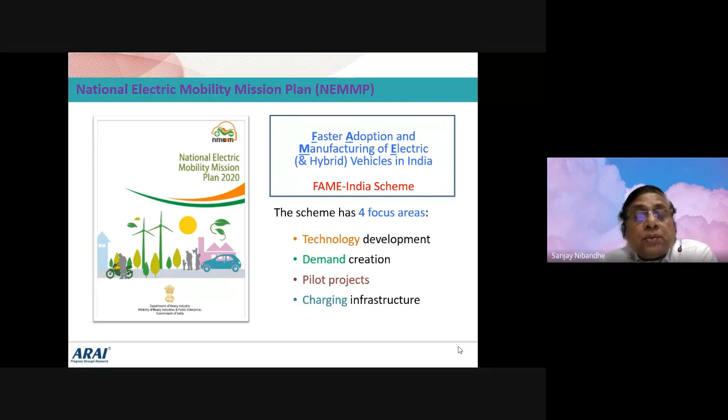So if you look at FAME, there were two policies: FAME 1 and FAME 2. In FAME 1, certain allowances were given to manufacturers so that charges of excise duty, or today's GST, were exempted in terms of tax reduction facility, which could be passed directly to the customer. So the customer also gets benefited, OEMs also get benefited, and promotional policy by the Maharashtra government or Indian government was taken up by various states as well, so that India, particularly the northern belt, picked up very fast and could progress well.

If you look at the number of vehicles being deployed, it's quite a large number. Niti Aayog's reports also say that mobility transformation requires a lot of focus on alternative fuels, alternative energy, or electric vehicles.

There is one concept of shared vehicles, a second concept of electrical vehicles, and a third concept of connected vehicles, which can see good market potential by 2030. That is how the entire policy was framed, so that growth can happen and the current level of manufacturing of gasoline or diesel vehicles can substantially come down.

Even today's budget has indicated that an old vehicles scrapping policy has been considered, after necessary approvals. Probably after 15 years, one can look forward to scrapping of those old vehicles.

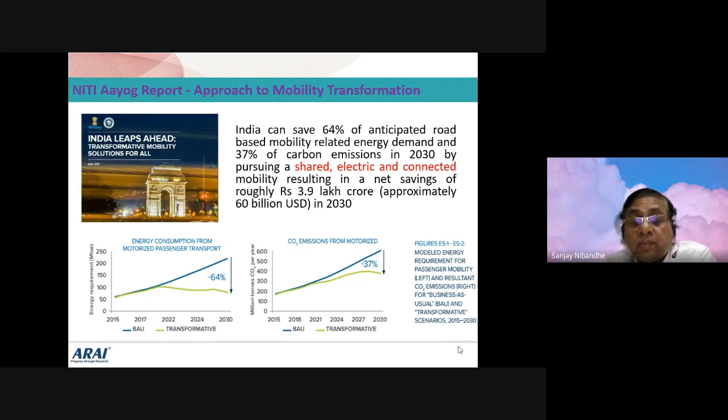There's also an indirect benefit of emission reduction, as these non-polluting vehicles come from electric mobility, or maybe hybrid vehicles, or hydrogen vehicles which may come up in future. Looking forward, there are certain global areas where European countries have taken up a stringent target.

By 2030 they want to achieve more than 50% EV vehicles in the market. They also look forward to eliminating complete usage of fossil fuel by 2040, focusing on electric transformation, with electric transportation primarily considered. So companies like Volvo, Daimler, Volkswagen, and Mercedes came into the picture and started producing those vehicles.

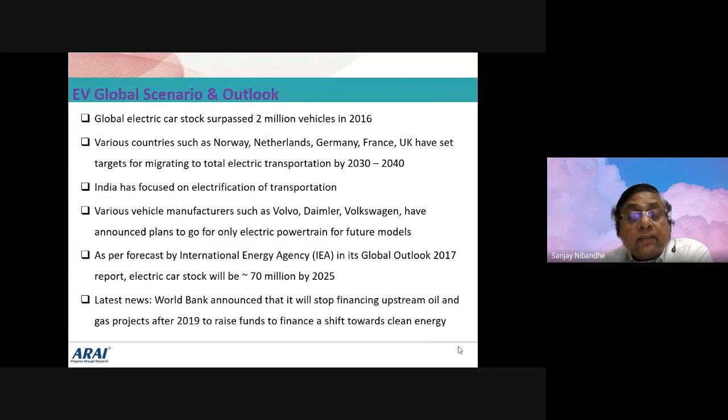The International Energy Agency's Global Outlook report says electric car stock will go to 70 million by 2025. That means a huge number of electric vehicles will be produced by all these OEMs, and people will certainly make use of them. If you look at the products, you have everything from small two-wheelers to huge trucks that can run on electric power. We are going to see all those examples as well.

That is how the World Bank is supporting policies across the world that are supportive of electric vehicle mobilization.

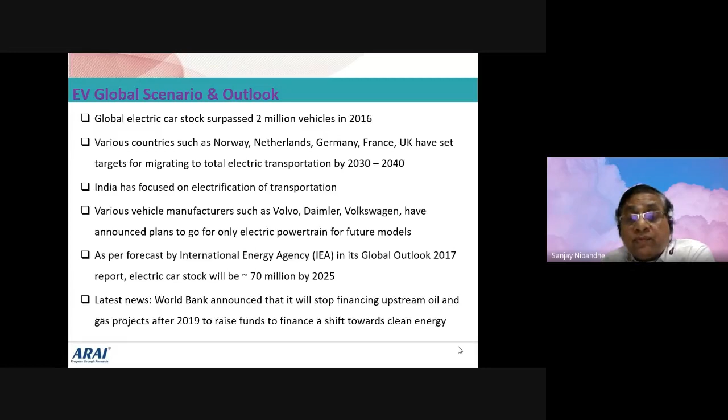Now the government in India is also keen to convert e-rickshaws, e-autos, taxis, and buses. For Mumbai, Pune, Nagpur, and major metro cities, they have already adopted policies for city transport buses to be converted to electric mobility. More than 500 buses have been ordered even in pandemic conditions and supplied to cities like Mumbai and Pune, which have started using those electric buses.

Of course, there will be some problems we can look into, but the major objectives are reduction in the fuel bill for fossil fuels like gasoline and diesel, and emission reduction, which need to be handled in a large way.

There is another area that talks about swappable batteries, and recently a regulation has come up which says the car manufacturer can sell their car without selling the battery.

So cost of the battery will be eliminated from the car prices. Similarly, when you go to the market, there are agencies which are available and which will help you to do the swappable batteries, like go to a service station, change your battery and go for the renting purpose as the normal charges for electrification are being charged.

They may charge you on a little higher side, but the basic investment of something like 1.5 lakhs to 2 lakhs will not be required in the initial stage, so that the cars will be cheaper and more promotion can happen from that perspective also. From private vehicles to the larger ecosystems, they are helping you, and that is how the entire scenario is positive on electric vehicle programs.

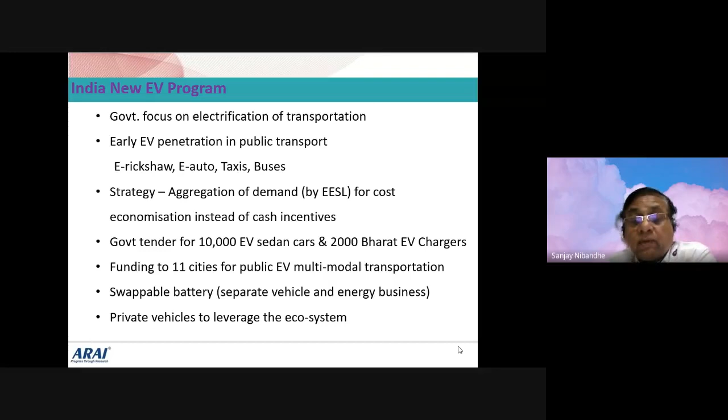So if you look at various parameters, the Paris climate change is one of the reasons, ambient air quality concerns, which we talked about, and we have seen in pandemic conditions there was clarity on the ambient clean air quality. People can have larger visibility. Also, from the northern belt they can see the Himalaya range, or also the birds and the animals which are coming on the road because of the silence, or even the pure air which was absorbed by everybody. So these kinds of benefits are very much found in the entire scenario.

Import bill of oil is another, which is a burden to India, and that's how people are more keen to reduce the import bill. Similarly, thrust on solar power generation and the storage of solar power is another area where the work is parallelly happening.

Sir, is it okay with the pace and the volume? Yes, sir. It's fine. Yes, yes, sir. Okay. Thank you, sir. Okay, okay. So we'll continue with this. I think that's a better thing to check in between.

So what are the drivers for electric and hybrid vehicles? The stringent emission norms, which we have already seen. Fuel economy we have already seen. Likewise, whenever the fuel prices go up, we always talk about, oh, this is the very low mileage which we are getting, and people always talk about the price of the fuel, which they are really concerned about. Then high specific power.

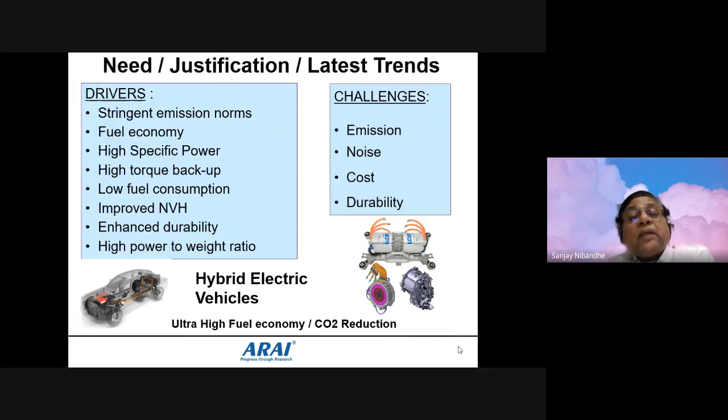In the electric vehicle scenario, I looked at it as one part. These are the standards which have been enforced as a part of the CMVR requirement, and any manufacturer in India has to follow certain requirements; these are the areas where they have to work. Like AIS 38 talks about the construction and functional part of it. AIS 39 talks about the measurement of electric energy consumption. Then AIS 40, the method of measuring the range. Range means per charge, how many kilometers it can clock.

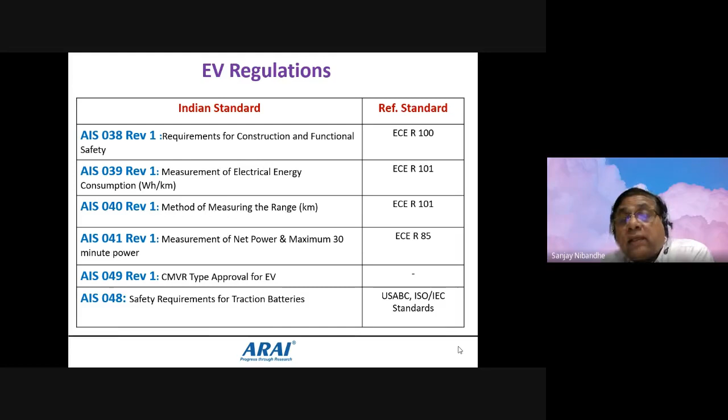Similarly, the 41 standard talks about the power from the motors or batteries. 49 talks about the CMVR approval for EV vehicles. That is a practice which has to be followed. And 48 talks about the batteries. These reference standards I have given for the purpose of reference; if you look at those European standards, they are comparable over here. And if vehicles are required to meet European requirements, or if you are trying to bring vehicles from Europe, you will see that these reference standards will be followed by those respective OEMs.

There are additional requirements like Indian standard AIS 102, that is for hybrid electric vehicles, and AIS 102 part 2 is also meant for hybrid electric vehicles. There are certain categories for better understanding. M and N categories have been classified as passenger and goods carrier vehicles, and less than 3.5 ton is the range for which part 1 is applicable, whereas for heavy vehicles above 3.5 ton, part 2 is applicable. These standards are always available on the ARAI website. If you want to know about the entire practices to be followed, you can download them from the ARAI website. It is free for all people to understand and transfer the knowledge to each other.

Then there is a specific requirement because of Indian business scenarios that is called retrofitment. You are well aware that in India, the typical mentality is that even after 15 years, nobody wants to scrap those vehicles. They want to reuse it. So there is an environmental tax which they have to pay to the RTO. Or you may like to convert your vehicle from gasoline to EV, and this type of EV conversion is also allowed, authenticated, and approved by sources like ARAI. So AIS 123 part 1 is applicable for M and N category less than 3.5 ton. 123 part 2 is for above 3.5 ton, and 123 part 3 is basically for the kit manufacturers so that you can supply the kits to the suppliers. So that way, the retrofitment kit which can be approved is also being considered.

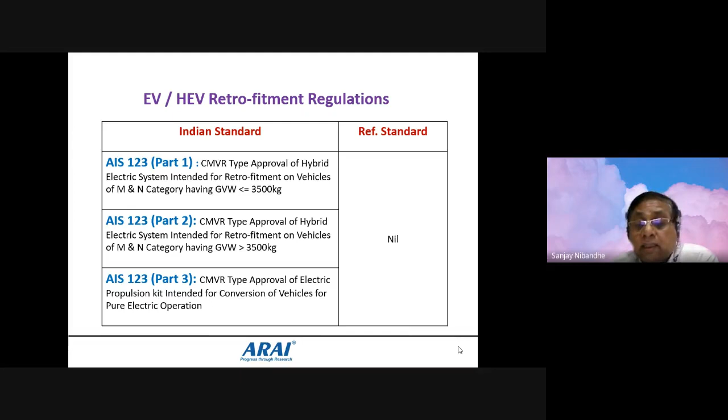So you may be a manufacturer or converter of the product, but you can get parts which have been approved by the respective supplier, buy those components, integrate them yourself and do the model approval so that you can be an authorized converter of vehicles or an authorized garage doing this type of conversion activity. And that's how this retrofitment business is also a huge business in India, which does not have a similar understanding in Europe or the USA. That's why there are no reference standards available for this. So we have made our own standards, and that is helping with the Indian requirements.

Now, when you see the electric vehicle, there is a combination of multiple things. When you say it is a purely electric vehicle, then there is no IC engine or SI engine. You have to take it out, and in place of that, you can put a motor, a battery charger, and the storage device for the electrical energy. That's how it is configured.

I'm not going to describe the figure. You can very well understand the figure, but battery, charger, fuel storage areas, you have to define, and you have to fix them in such a way that they are safe to operate and they are helping the entire purpose of the vehicle to drive as functional requirements.

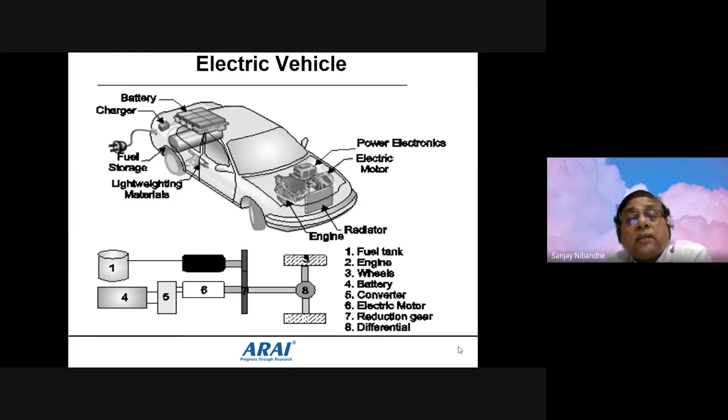Similarly, if it is a hybrid vehicle, both the combinations will be there, including the fuel tank, then powertrain in the front, and other areas like the transmission and the connections with the front wheel axle. So all those things will definitely be there in the case of hybrid vehicles. We will see the hybrid pictures as well. But if you look at this entire picture, you can come to know which are the parts involved in such type of activities.

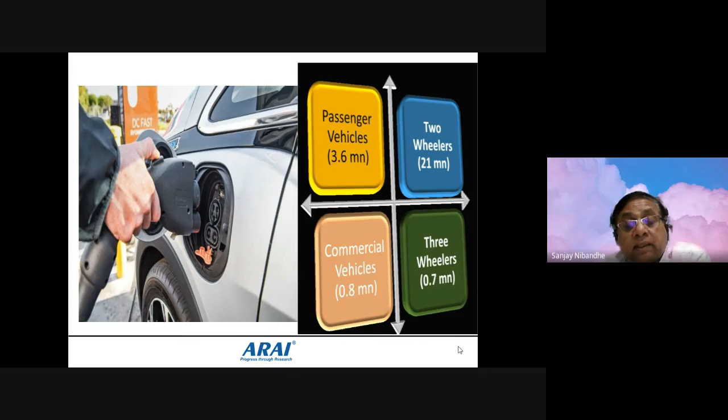In today's scenario, more than 3.6 million passenger vehicles are plying on the road. 21 million two-wheelers are plying on the road. Three-wheelers are more than 0.7, or close to 1 million vehicles. And commercial vehicles are at the 0.8 million level on the road. And there is a dire need of converting them to Indian requirements with the latest norms and trends being followed. So you can see the charger which is ready to connect with the electric vehicle, and the electric vehicle is properly configured here in the picture you are looking at.

And whenever there is no electricity grid available, or wherever they are not in the corridor areas, probably they can use their battery power which is available inside, which is fixed as per EV requirements. This type of trucking arrangement is likely to come up in India in the next 5 years. I would like to mention this only to see what is the potential business which we are looking at and which can be developed.

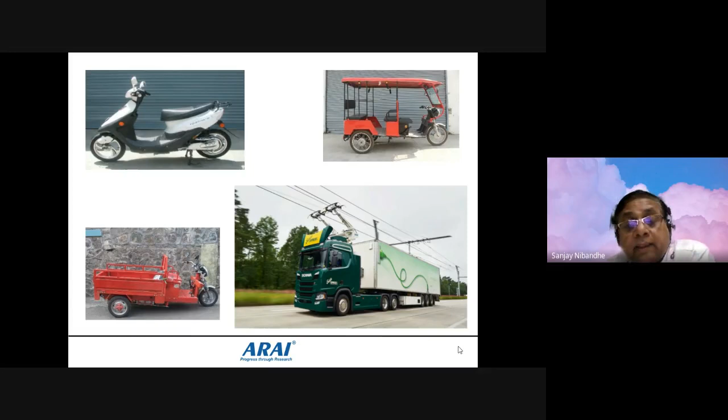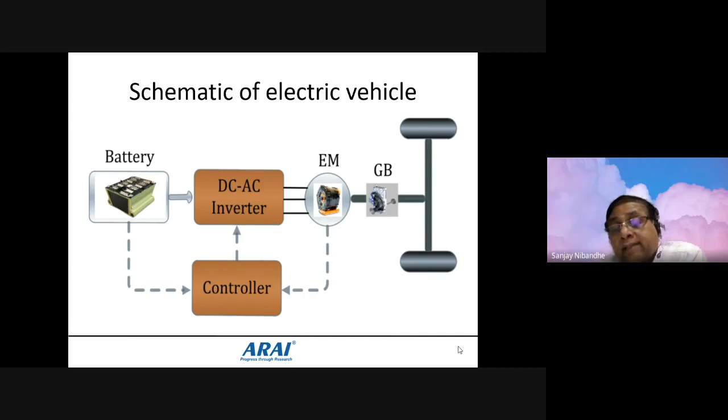This is the schematic diagram of electric vehicles. Battery is placed in between, inverter is there. Inverter is always controlled through the controller, which is giving you supply line from battery as well as to the electric motor. And the electric motor is coupled with the gearbox, coupled with the differential or axle level, and then that drives the vehicle in totality.

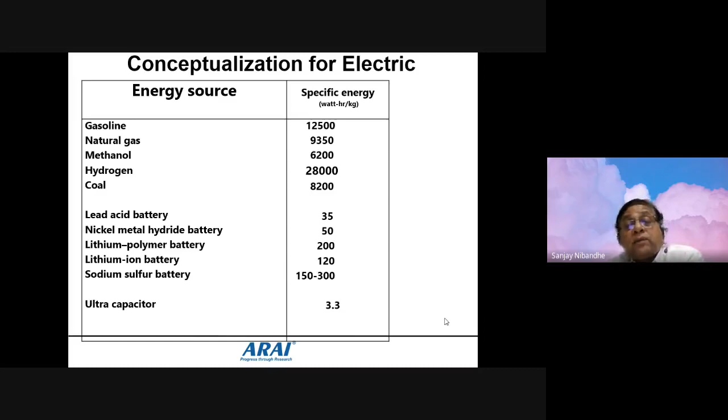Then lead acid batteries, if you compare, have a very low specific energy, nickel metal hydride batteries give something like 50 watt hour. Lithium ion batteries, which are more commonly used, lithium ion or lithium polymer batteries, are in the range of 120 to 200. And sodium sulfur is another type of battery which is likely to come up in the range of 150 to 300 watt hour per kg. Ultra capacitors are used mostly in the aerospace industries. Likewise, we have the devices for energy storage, and based on that, what is best suited for our application is required to be decided.

And generally in today's scenario, lithium ion batteries are well known, but lithium itself is not available in ample quantity in India. Recently, one lithium ore has been identified in Rajasthan, and Karnataka started producing lithium from one location, which is yet to reach a more commercial level. So in today's scenario, all lithium ion is mainly imported from China, and this China dependency is really a question mark for all of us.

So EVs are at stake, but we are lucky enough to say that at least 2 locations in India could really have something to deal with, and we can have lithium-ion batteries produced in India in future. As of date, most people are trying to get the cells from either Korea or China and assemble them here, which has a special demand on the technology part of it, because the entire battery itself is the volatile part which requires a lot of understanding about the battery requirements.

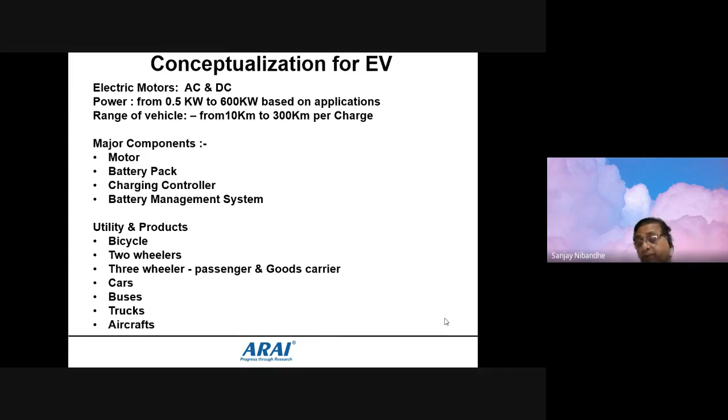So something like a bicycle, you can use it for 10 kilometers, and after that you may need charging, or cars going up to 300 kilometers, like the Tata Motors Tigor, one of the classical examples, which could meet about 300 kilometers per charge. That means between Pune and Mumbai, you can have one trip on one charge, and then you may need charging again. This major components or utility list I'm not going to read out, but it is very well understood that multiple programs and projects can be taken up for these market requirements, including aircraft flying on battery power, which is also being considered.

Now, typically, these electric motors have instant torque, and this instant torque within something like 1500 RPM of the battery motor gives you an instant, constant, gradual rise in torque, which you can see as faster acceleration. Then it works at steady speed, driven at constant speed, and the motor produces that much power at a successive rate. That's how this motor characterization is very important to integrate at the vehicle level.

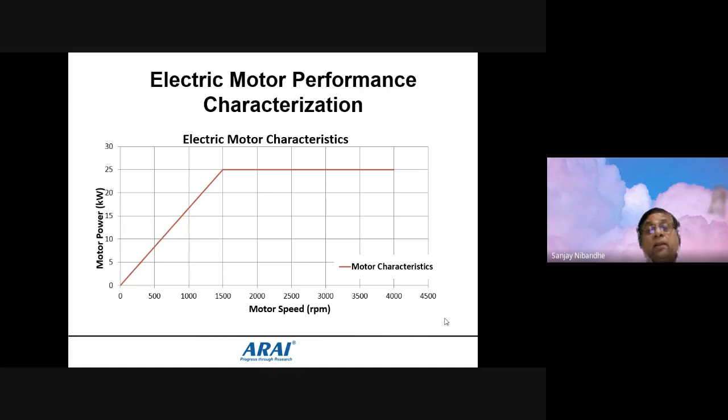So motors are typically of certain natures. We can see what types of motors are being used. There is the permanent magnet type, PM motor with AC system, used in most EVs, and these are considered high efficiency, high torque, short but constant, and the power range is also smaller.

Then the induction motor, three-phase AC motors used in Tesla, Toyota RAV4 kinds of vehicles, and wide applications have been seen for induction motors: simple and robust, wide speed. You can have a range of something like 300 plus. These are considered less efficient than permanent magnet, but they have been widely used.

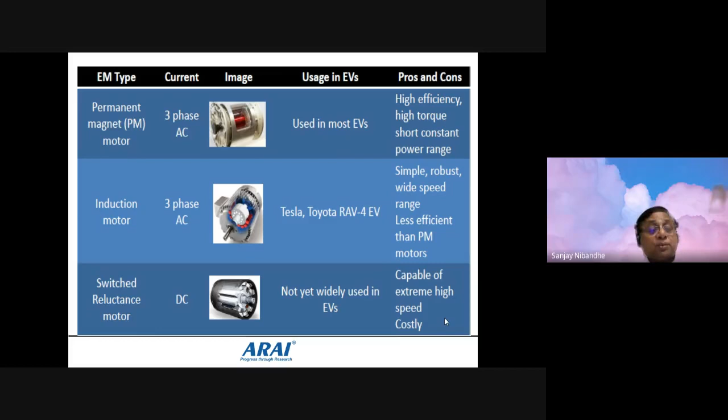And switched reluctance motors, DC motors, are coming up in a new scenario, and they're also being considered for small three-wheeler applications or the hub motors produced with new technologies. They are trying to be used for these requirements in the longer term. Extremely high speed motors, and a little bit costly. So having a known understanding of which motors are suitable for our product is to be looked at.

Then the BMS pack, how does it look like? The battery cell is something like a package deal, where you have seen a series of battery cells which have been aligned in series and then connected in parallel, and they are packed in well thermally sealed conditions. Also, water cooling provisions or air cooling provisions have been provided so that cooling can be effectively managed.

And the BMS makes a major deal about the battery part of it. Each and every cell has potential energy which is tapped in connection with the requirement of charging as well as discharging when the motors are driven through the battery. So in these environmental conditions at ambient temperature, or when it is run to the highest level, that is maximum extraction of energy, whatever heat dissipation happens, we have to have control over it, and that is how thermal management control is the most critical exercise the BMS has to do.

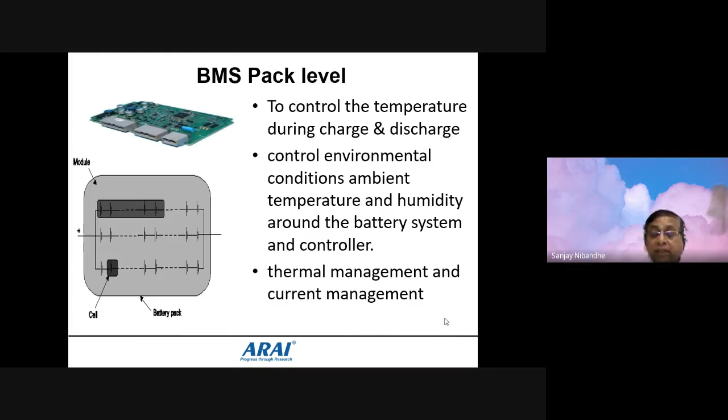Similarly, when you are trying to charge the battery, each individual temperature level is monitored. If it is exceeded, then it is required to be tripped off. Otherwise, it will go into heat generation and spoil the next cell. Probably the entire battery can be damaged just because of excessive current and temperature inside the battery. So this BMS plays the major role in the entire system.

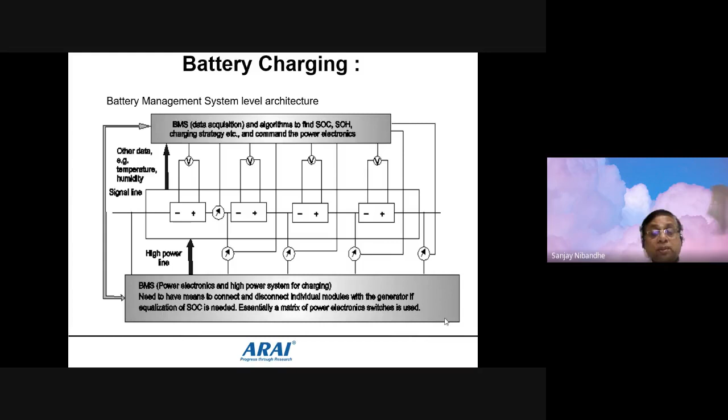Then there is the charging methodology which has to be followed, which is a schematic diagram I'm trying to showcase here. But more important is how the charge and the performance of the battery are. If you charge for the full range, probably you can get maximum battery utilization, and battery performance and the entire efficiency of the battery can be worked out for the charging and discharging cycle. That is called the SOC of the battery.

And SOC is expressed as a function of V, I, T, Z, and R, where V is the battery open circuit voltage, I is the current, T is the temperature, Z is the battery impedance, and R is the battery voltage relaxation time after the application of the step current. That means how the effect will happen temperature-wise.

You can see if the temperature goes up, battery performance comes down, and the reverse way, the highest efficiency you can see at the lowest temperature, in the operating temperature range in Fahrenheit which has been given. So we have to convert it into degrees centigrade, and based on that you can see the best usage.

If I tell you the example of something like bus or car charging systems - in summer zones like Nagpur or Pune, when temperature goes above 45 degrees, charging is done only to 30-40% level and cannot go to full charge. So you have to wait till temperature comes down, or make the ambience suitable, something between 30 degrees, and have a cooling system available for all charging areas so the battery charging can be done effectively. That's how the service station concept came up in future - that was one of the reasons for it.

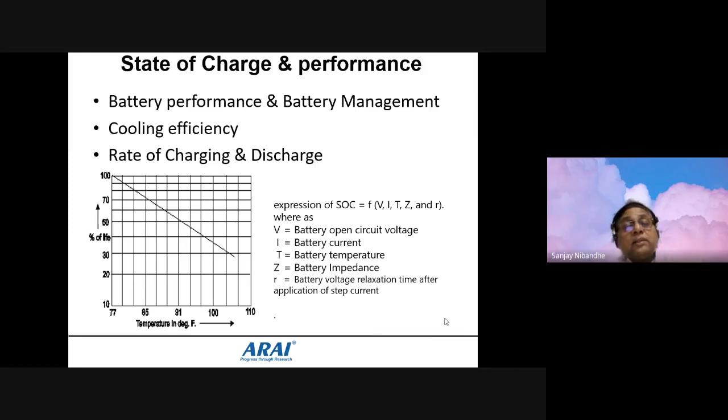Similarly, crash tests happen. In a crash test, if your vehicle is an electric car that meets with an accident and something goes wrong, what impacts do we have to face? We have to study completely whether the discharge of current has not converted into earthing of the vehicle body, and whether the passengers inside are safe, or whoever goes for safeguarding those accidental people may face serious consequences in such situations.

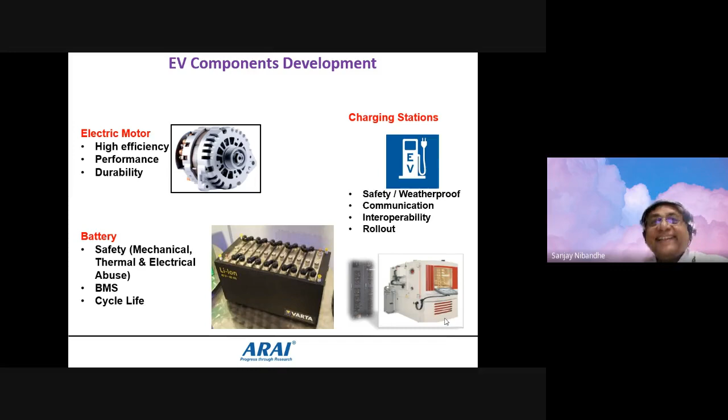So I would switch over from here to the hybridization program. Probably with these inputs, the electric side is good enough at this point of time. Once you are connected directly with the vehicle, you can see and experiment on the EVs which are presently available.

Now, if I talk about hybrid vehicles, the hybridization programs started about 5 or 6 years back when the micro hybrid was introduced. Micro hybrid is one category mainly deployed on the starting system, and many vehicles have been made similar to the micro hybrid requirements.

So they have fuel saving whenever your vehicle is standing at a signal for about 10 to 15 seconds, they try to save energy by not having combustion while the vehicle is stopped at the signal. The starting system and battery system which are loaded in this way is considered as a micro hybrid.

Similarly, mild hybrids have been taken care of. Regenerative braking is one of the areas by which you can charge the same 12-volt batteries, using battery energy to assist the engine and enable downsizing of the engine. This is one of the added features considered in the latest vehicles.

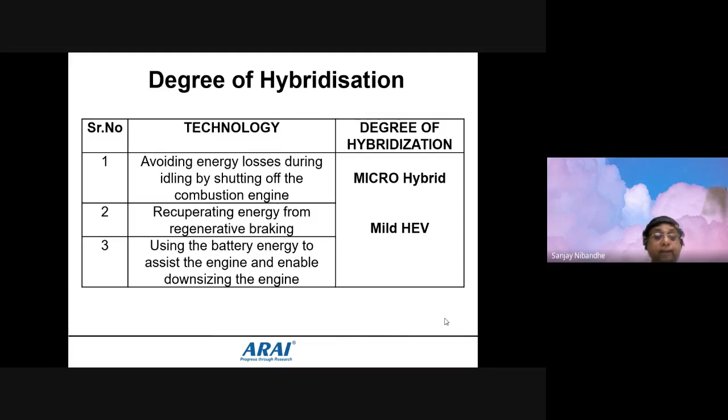When you are driving in the city, you drive it with the battery. When you are driving on the highways, you can drive it on the combustion engine. That's how it is helping you for driving the vehicle at two different energy sources, and that is considered as the effectiveness for the hybrid vehicles.

Then PHEV, plug-in hybrid vehicles - when you come back for recharging, plug and play is the kind of scenario by which recharging helps restore the energy in your batteries, and you can start plying the vehicle as and when you require it after the full charge is available.

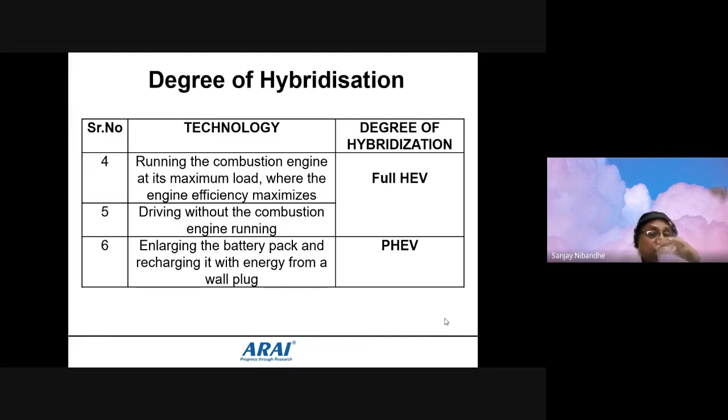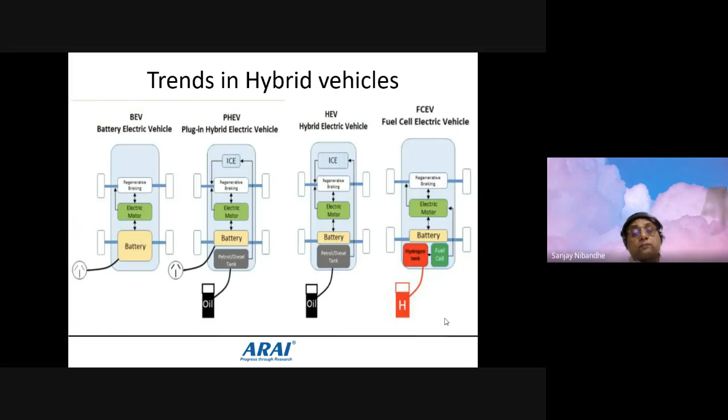Now, when we consider the case study of hybridization, the hybrid vehicle architecture is one of the most crucial parts of it. The best possible CO2 reduction and lowest fuel consumption are the key parameters which we have already seen.

Then downsizing is another area. The diesel engine was downsized to the optimum level, and the electric motor used for this purpose is also optimized to a certain level so that you can have the combination of these two. Then retrofitment possibility also needs to be worked out.

Maximum weight increase for electrical components - because of the current scenario, whatever diesel engine or petrol engine you are trying to retain in the system has to go along with the electric drive parts. So if you are going to add something like 200 kg weight, then your car, bus, truck, or goods carrier vehicle needs to be capable of driving such increased load because of adding the electric parts.

Then efficient controls for electric drive technology for the transient operations - how the transformation from electric to gasoline vehicle or gasoline to electric vehicle, and how smoothly it transforms from one end to another, is the most critical part of it.

The NVH features we have already seen, and cost is definitely going to increase because of the electric parts added too. So looking at the entire cost pattern of the vehicle, it's a major decision by which we have to work for the hybridization very, very carefully.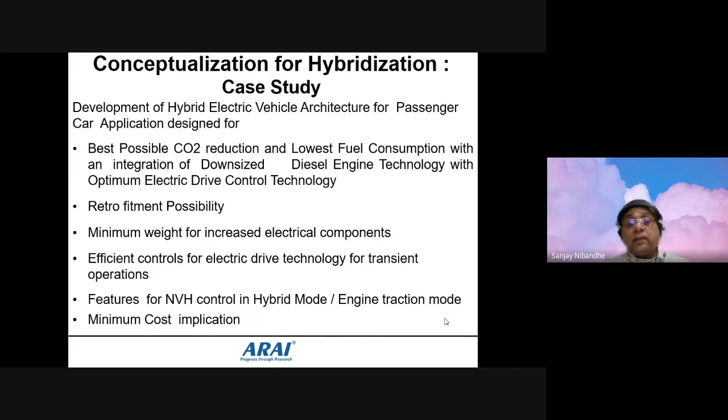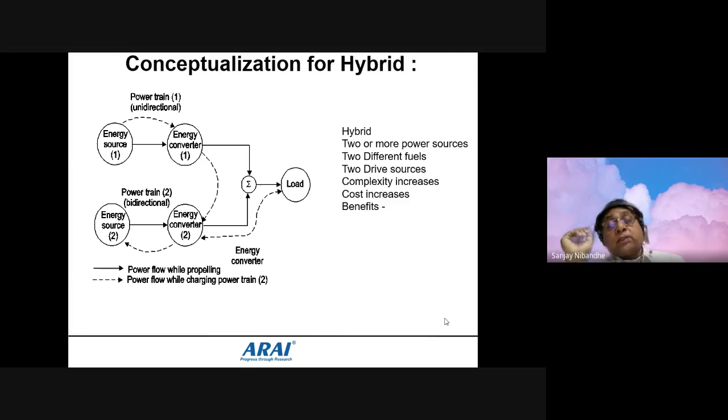Now I have given you the schematic diagrams of it. The load is the final end where you have connected with your wheels, and two different energy sources try to supply it, and how it is integrated and the flow is taken care of is also shown. This is the basic concept of the hybrid vehicle.

And electric transmission or the motor supports you for going forward for that kind of drive establishment for the hybrid vehicles. Similarly, this is the trans motor which showcases the configuration of the internal construction, which helps for better understanding only. The input and output shaft in the clutching system has been shown, so that smooth synchronization should take place between the electric motor versus the gasoline drive available over there.

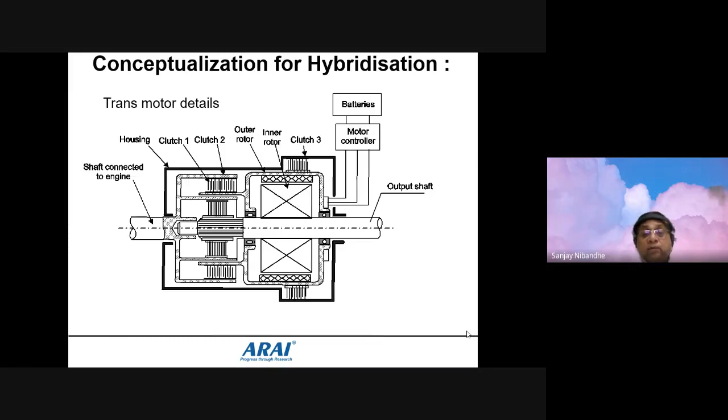Now this is an alternate torque and speed hybrid electric drivetrain, which has the planetary gearbox, and the planetary gearbox shows all the connections by which one side is engine driving, the second side is your motor driving, and that is coupled with the differential so that the axle can drive. But these connections and the entire packaging part of it are a critical part of the design of the transmission.

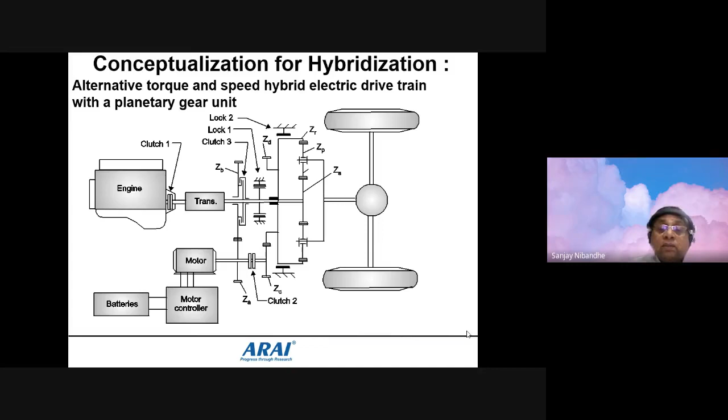Now if you look at this same concept in the schematic diagram shown here, finally the electric motor drives, and that is called a series hybrid vehicle. Such type of vehicles are already available in the market.

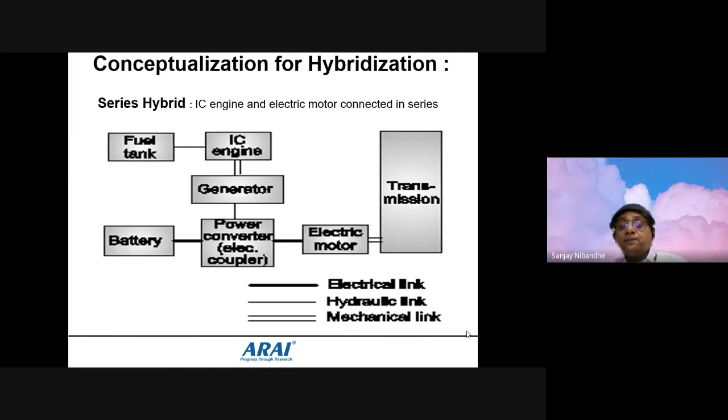The IC engine drives independently, the battery is driving from the other side, and finally the transmission is driving your vehicle. So I'm going to showcase you series, parallel, and combination.

Now this is the hub motor configuration. Motors are directly coupled with the wheels, and the same way one side is the engine, one side is your battery, which is trying to feed the power to the wheel end through the motors. And that is how the configuration of the hub motor can be seen in the series connections.

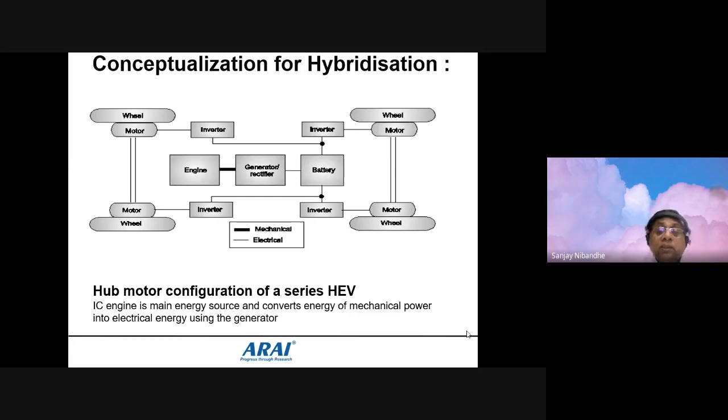Similar way, in the parallel connections, both the systems are independently working. Mechanical couplers are connected to the transmissions, and the transmission is connected with the rear axle or the front axle, wherever it is configured. These are just for better understanding.

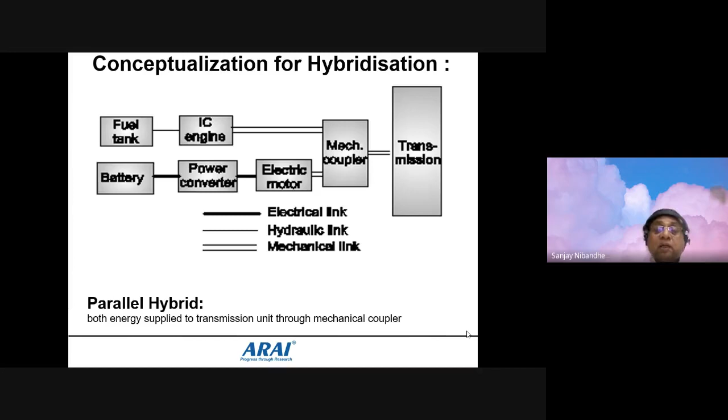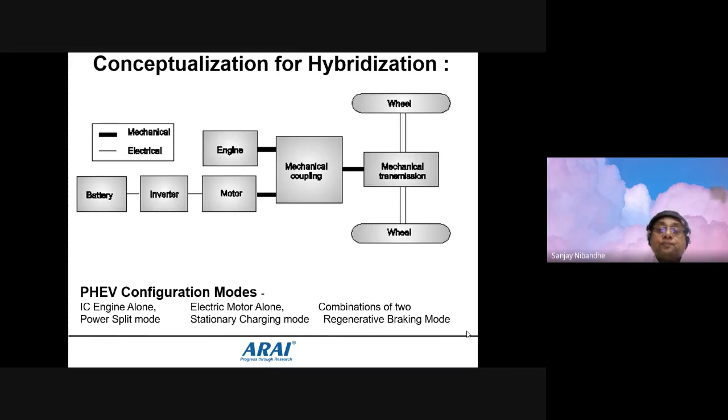Series and parallel hybrids operate as series or parallel. The engine is linked with the final drive, and power to the wheels is directly given. So this works in line with HEVs, and the second electric motor is working as a generator. Since series and parallel hybrid vehicles are operated in both versions, it gives the advantages of high fuel efficiency along with excellent drivability.

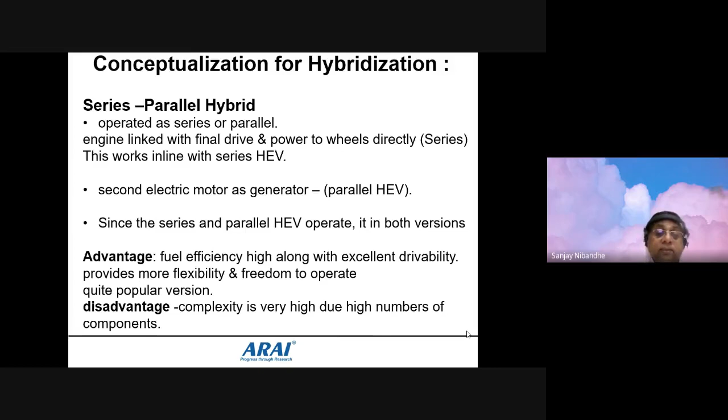So for drivability development, a good amount of work has to be done to develop the proper drivability, speed synchronization, and expected response from the throttle versus the motor. And this is how the complexity of the job is increased. In totality, it is considered a definitely complex job to handle.

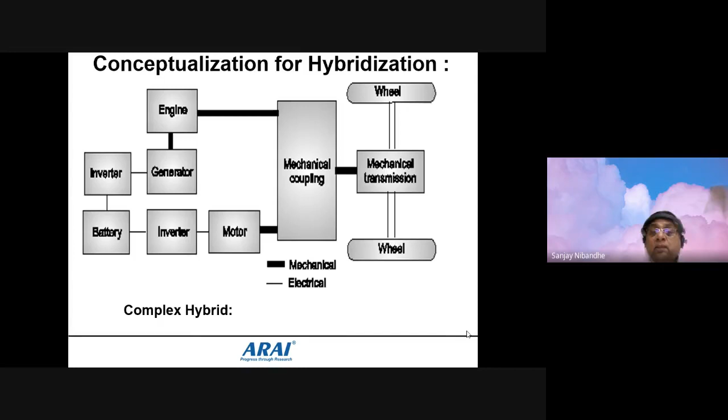Similarly, this is a configuration of hybridization. Complex hybrid is another system considered here, which is similar to series parallel hybrid, finally driving the vehicle at the wheel end. In the complex hybrid system, multiple motors are used and planetary gears are involved. Generally, it is with four-wheel drive or all-wheel drive vehicles available in recent market trends, and separate drive axles are used for such purpose. The generator is used to perform the series operations as well as control of the engine.

Two electric motors are used to get all-wheel drive performance, and at the same time it supports regenerative braking. This also helps with enhancing vehicle stability and anti-lock braking. So these are the advantages one can derive, and for anti-lock braking or vehicle stability, vehicle development people will come to know how much time and energy they have to spend.

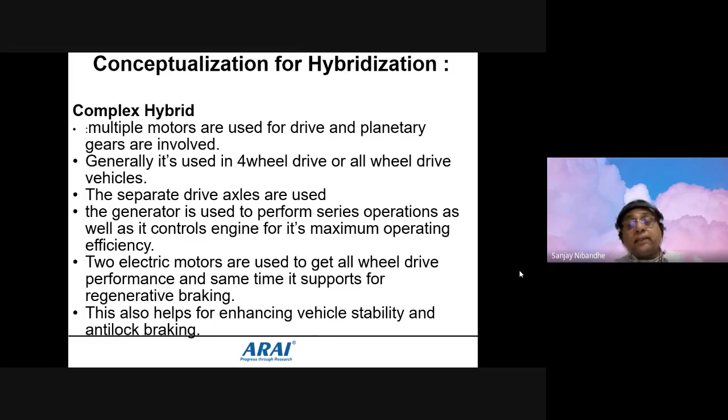So looking at this hybrid powertrain development, which is a basic program and needs a lot of time dedicated to it, hardware in loop, baseline performance preparation, all those things have tremendous work to be done. At each stage of vehicle validation, in validation prototypes or production prototypes, they have to be established properly to the satisfaction of your customer, and only then can optimized solutions be offered in the market.

So this is the major chunk of the area where industry normally spends between 6 months to 1 year's time, and the involvement of engineers developing those specific powertrains is one area where industry spends a lot of energy as well as time resources to experiment and come to an acceptable version of the powertrain which can go in the market.

So I would just like to emphasize that this is one of the challenges which industry people need to meet, and probably there is a lot of good scope for professors to work upon, even to develop such vehicles, and they can be part of the programs wherever such opportunities are available.

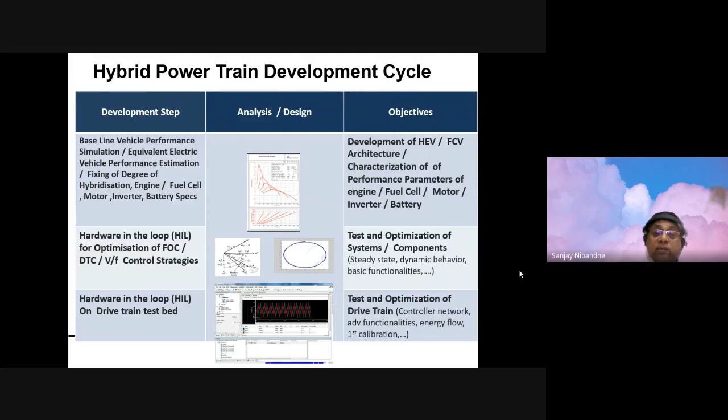These are the simulation techniques. CRUISE algorithms are available. Software-based technologies are available by which one can have exposure to it, and this exposure is trying to give you an overview of how that kind of development can take place. And again, as I said, 6 to 8 months down the line, you may have to spend the time to develop such perfect vehicles in the market which can be widely acceptable for the customer's needs.

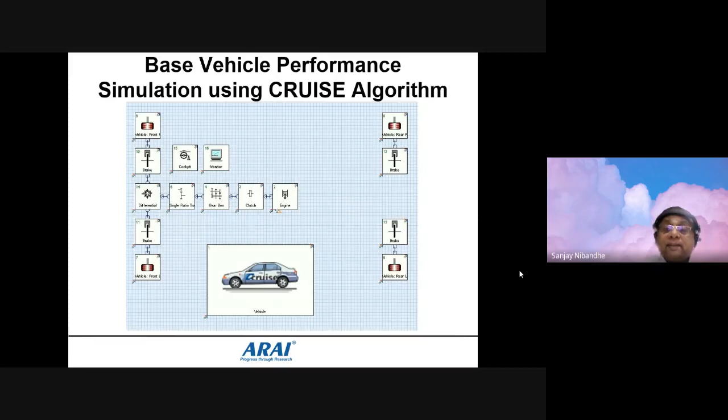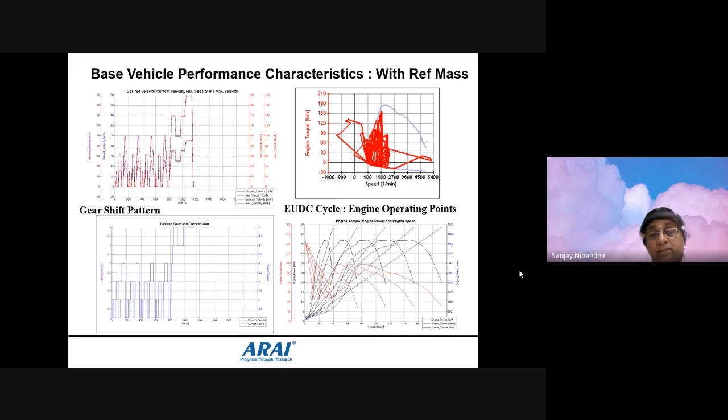So in these areas, engineers from industry spend a good amount of time, and also at ARAI level, the team works on all such matters to develop such technologies. It's one of the challenges; area-wise, specific technical domain knowledge is required to deal with all these matters.

So hybrids are going to come up in the market in large numbers, and those vehicles are already in the domain. I can name a couple of vehicles, like the Toyota Camry, or the Honda Civic. Certain Indian OEMs are also taking up hybrid vehicle programs, and they may come up in due course of time.

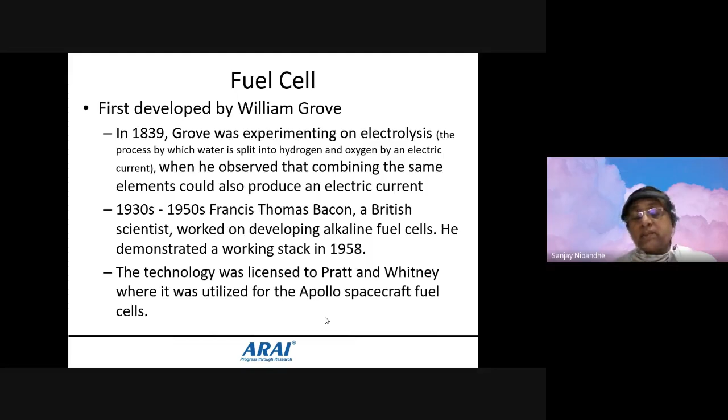Okay, so the last part which I'm going to cover is the fuel cell. This technology is already there in the domain, but we need to work on specific development. In today's scenario, these developments in advanced countries are going on well, with a certain level of understanding about the technology available there. If I show you a picture, hydrogen vehicles are already running on US roads. In California or the New York areas, you can see such vehicles on the road.

But even in America, it is not very popular. It is only on the experimentation basis, and few European countries have started working on that side. So development of hydrogen fuel is one of the future parts which has been taken into consideration.

Hydrogen is obtained by reforming the various gaseous fuels like producer gas, then biogas from organic waste or other biomass, or natural gases, or liquefied petroleum gas, and liquid fuels like methanol or ethanol. By conversion, you can extract the hydrogen, which can be usable as a part of the electricity producing part, and finally it charges your battery for the purpose of driving the motors.

So all three are connected, including hybrid vehicles or hydrogen vehicles or even fuel cell vehicles, and how to store hydrogen as a fuel, how to keep the fuel cells in the vehicle, because it is very heavyweight, it has certain understanding, limitations and plus points, which we need to see in detail.

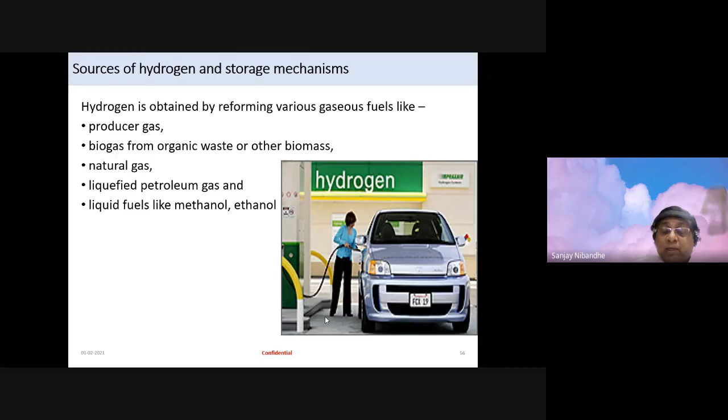Now, sources of hydrogen and storage mechanisms. Economical reformation of the technology for hydrogen production is still today, whatever the industry type of hydrogen is made available, which is directly usable for this type of automotives, which is required to be stored in proper ways, so that the pressurized tanks for required gaseous hydrogen is one of the challenges for us today.

As you are aware, hydrogen gas itself is highly explosive, and handling of hydrogen gas as a highly explosive matter, we have to be very, very cautious and specifically take care of the entire safety aspect of the requirement. Advanced carbon material absorption is another inherent feature by which carbon nanotubes or alkali-doped carbon nanotubes, carbon nanotubes or graphite nanofibers are required to store for that matter.

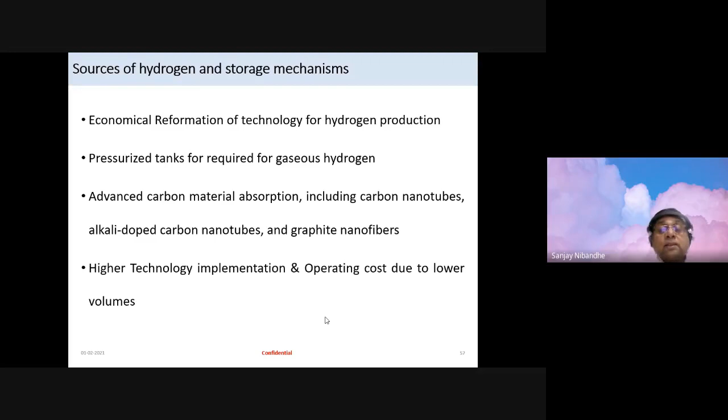Or if it is a metal storage case, probably it starts eating up the carbon particles inside the metal which has been used as MS plates or the steel plates used for the storage containers. The higher technology implementation or operating costs due to the lower volumes. Today's technology-wise implementation is definitely a bit expensive. The operating cost is definitely higher due to the low volumes, and in such cases, we may have to move more and more towards future development.

Similarly, the hydrogen line which has to be dealt with is highly explosive, so we have to have safety features in mind, and then the battery itself, with charging, discharging and SOC, we have to maintain its temperature and all those things which we have to take into consideration over here.

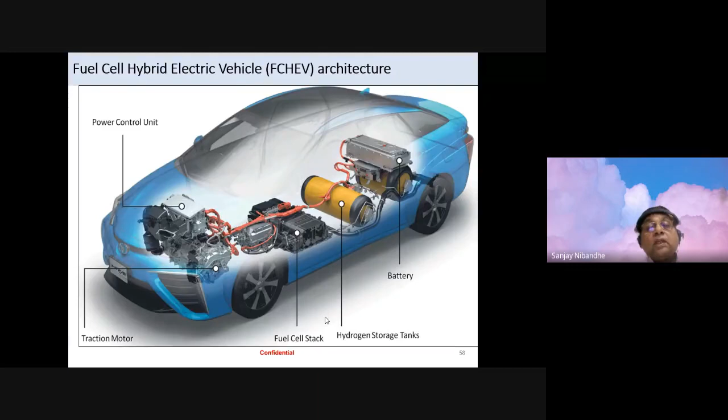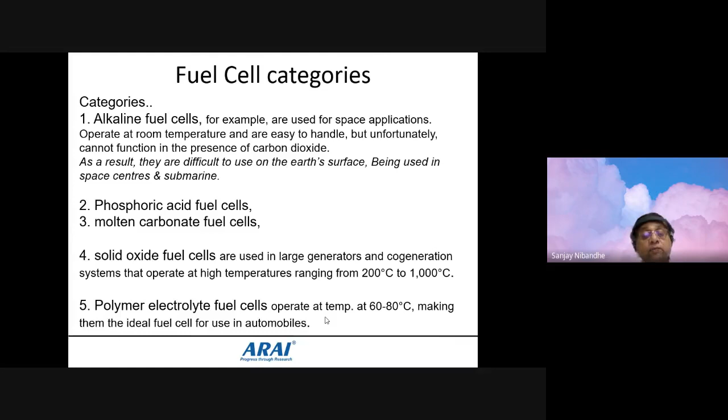So looking at the fuel cell, alkaline fuel cells are one of the types. Phosphoric acid fuel cells is the second type. Molten carbonate fuel cells is the third type. Solid oxide fuel cells is the fourth type, and polymer electrolyte fuel cells is the fifth type, which operate at different operating temperatures. We can see the comparison of it. These fuel cells are operating, and specific technologies are used for the development of the hydrogen gas out of these fuel cell categories.

And the other applications can be converted for DG sets or maybe some solid states, whereas localized stable productions can be considered as non-movable energy sources. And in some areas like solid oxide fuel cells, the operating temperature itself is a challenge to make it operational at 1000 degrees. Like you have to have the furnace before putting a power plant there. Likewise, certain understandings and limitations we may have to understand about it.

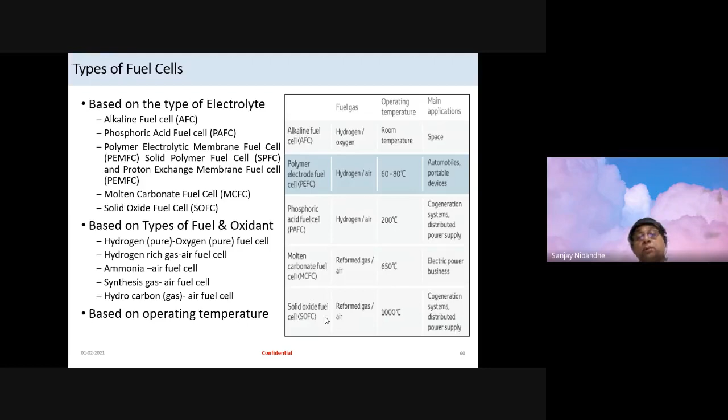Solid oxide fuel cells, SOFC, is considered as a range extender in present electric vehicles. Although technology-wise it is a little low-end technology, operating temperature-wise it is quite high when it operates.

But this particular range extender application has been considered, and surprisingly, one of the Nissan vehicles was produced with the solid oxide fuel cell, that too in the Brazil market. But we don't have much data about it, whether it is a successful model or not. But some of the automotive manufacturers have made some experiments, and they have used the technology over there.

The proposed solution seems to be very encouraging and promising, mainly due to the presence of the onboard fuel cell for charging of the battery, and hence the user will not have range anxiety. That means it is continuously charging your battery, and you can keep on using it since you are carrying the plant on the car level.

SOFCs are available relatively cheaper than the proton exchange membrane based fuel cells which are widely used in automotive applications. The SOFC trend is yet to come up, but it is seen as a useful device for us to go for hybridization.

Then the proton exchange membrane, PEM, fuel cells are widely used in automotive applications. Larger fleets of city buses are already converted, and they are plying on the road as hybrid electric vehicles. In India it is yet to come. The main reason, you are aware, is that the temperature zone is the critical parameter for us. The operation and implementation cost is 3 times higher than conventional mobility solutions as on date; probably in future the cost may come down.

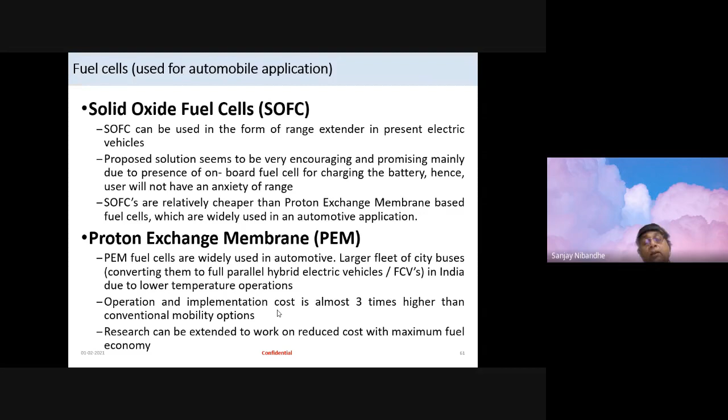The fuel cell vehicles currently available have come from that area and the PEM area, and people are trying to use them in the USA or Germany in very particular categories. They are trying to use this PEM type of technology and see that it is useful as part of the current level of understanding. Of course, on limitations of cost, operating cost, or how to get the maximum fuel efficiency, all that work is yet to happen.

In both cases, sizing of systems like the battery, inverter, supercapacitors, and the fuel cell, along with the optimal control strategy for the driving cycle, is the biggest challenge one has to work upon. What is the capacity of the battery? What is the inverter size? What type of supercapacitor, and what current level of the supercapacitor can help us? All those are the question marks which we have to deal with.

The second important aspect is economical vehicle development. That itself is a big investment for the development programs. In today's scenario, those developments in India are not visible because our needs are different. Our investments in that type of technology development are not yet happening. However, advanced countries like the US, Sweden, or Germany can afford to spend money. So they are working on it, and a couple of universities are working. That's how hybrid development, hydrogen development or fuel development is part of their program as on date.

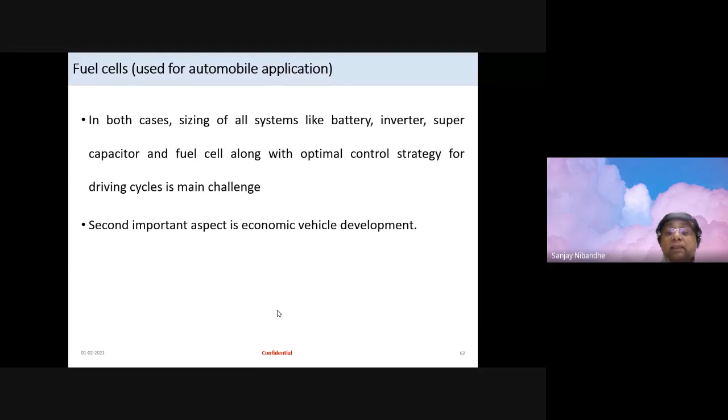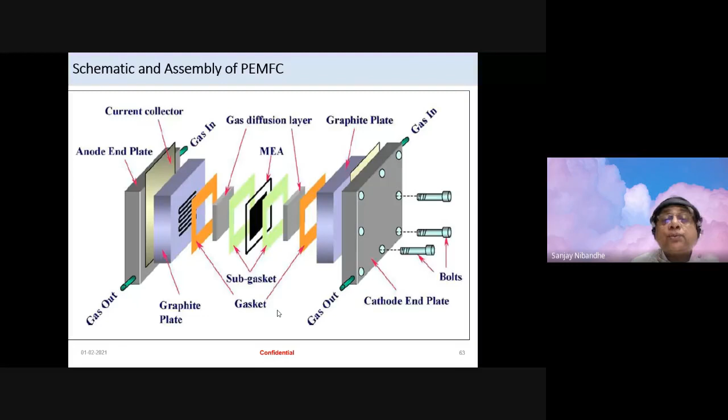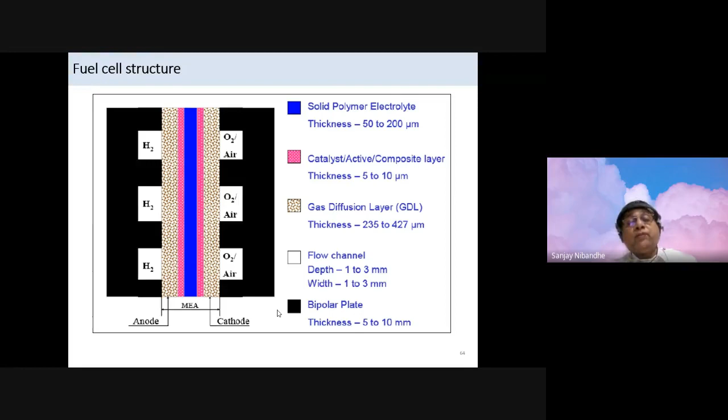That's how electrification flow can happen, and that is how the layers have been showcased in the fuel cell structure. So if I show you the working principles, a fuel cell is a device that uses hydrogen and oxygen to create electricity through an electrochemical process. A single fuel cell consists of an electrolyte material sandwiched between two thin electrodes. The porous anode and cathode have been placed there, as we have seen in the picture.

Hydrogen or hydrogen-rich fuel is fed to the anode, wherein the platinum catalyst separates the negatively charged electrons from the positively charged hydrogen ions. That is how protons and electrons are separated out. Then at the cathode, oxygen gas, that is O2, is forced through the catalyst from one end to another, and it reacts with the stronger negative charge. The negative charge attracts the two hydrogen ions through the membrane, which combine with the oxygen atom and two electrons from the external circuit to form a water molecule. So electrons are getting freed, and the outcome is H2O.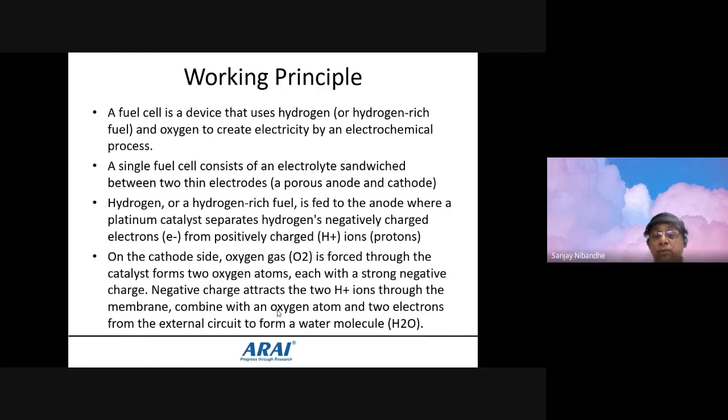Electrons from the anode side of the fuel cell cannot pass through the membrane to the positively charged cathode. They must travel around it via an electrical circuit outside the cell, and the movement of electrons is taken as electrical current, doing useful work such as rotating the motor. The amount of power produced by the fuel cell depends upon several factors, such as fuel cell type, fuel cell size, the temperature at which it operates, and the pressure at which the gases are supplied. Still, a single fuel cell produces enough electrical energy only for the smallest applications.

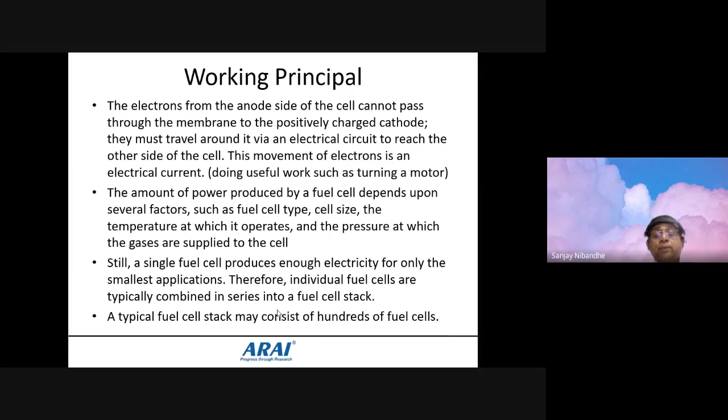That means a fuel cell can produce only a very small amount of electricity, not a large amount. Therefore, individual fuel cells are typically combined into fuel cell stacks. So a fuel cell is always considered as a large stack, which is shown in the next picture, and typically fuel cell stacks may consist of hundreds of fuel cells together. Like a lithium-ion battery is also considered in stacks: small cells are attached, properly welded, and connected with each other in series and then parallel. Likewise, the fuel cell configuration and packing happens in a similar way. The fuel cell stack has to happen over here.

This is the chemistry that happens in this case. I'm not going to read out everything; probably I can allow you to read it. So the chemical reactions have been showcased here, and in the net reaction H2 is coming in and electrons are getting freed, which get transferred from the anode to the cathode, and finally it is connected with the load.

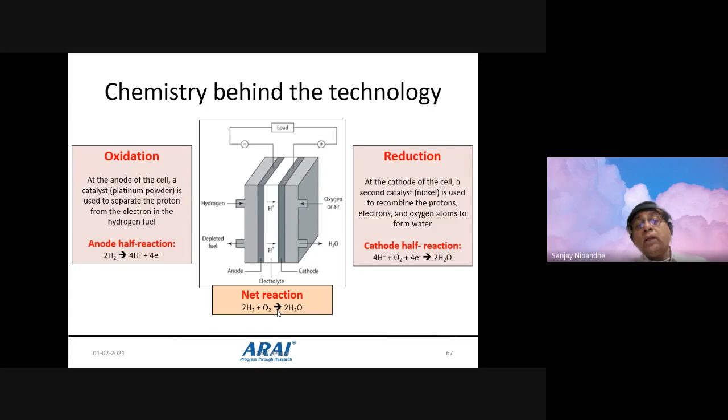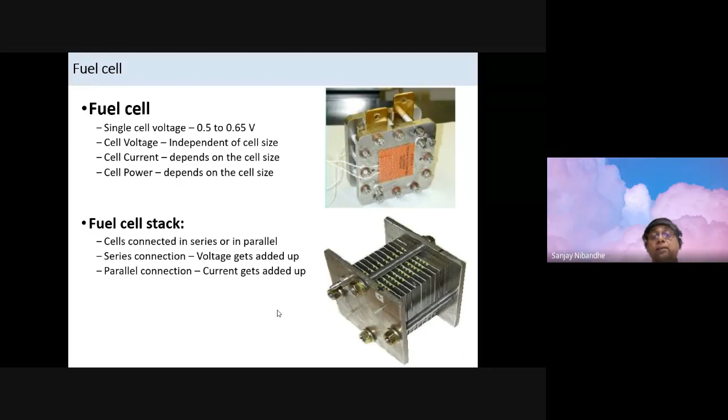This is the picture of the fuel cell shown here, and it produces only 0.5 to 0.65 volts. That's what I said: it cannot produce huge energy. One fuel cell can produce only 0.5 or 0.6 volts. So you have to have a stack of hundreds together, and only this kind of heavy stack can produce the expected voltage, which can be used for charging the battery. Cells are connected in series or parallel: in series connections voltage gets added up, and in parallel connections current gets added up. A combination of these two can be useful for charging the batteries and then supplying the electric motor drive of vehicles.

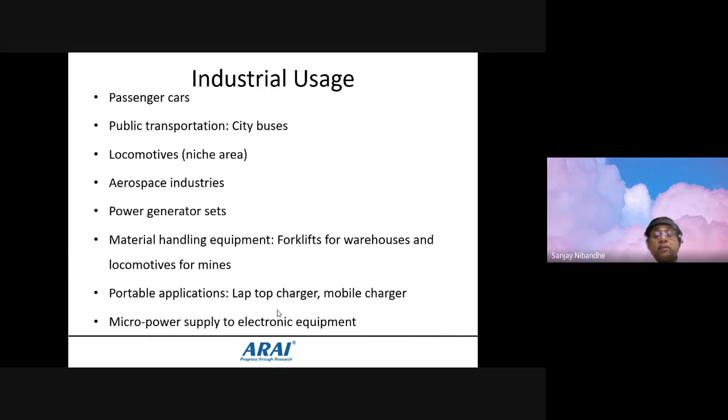What is the answer to it?

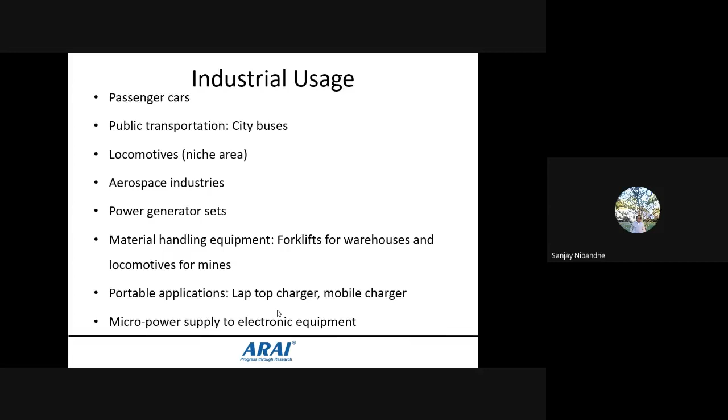Solid oxide fuel cells work at higher temperatures, between 800 to 1000 degrees. So you have to have preheating systems. The fuel supply has to undergo that 800 to 1000 degree temperature, something like furnace temperatures, and based on that only it can operate. But once it starts operating, it is continuous operation till you reduce the entire flow of the supply. Then this is definitely solid oxide fuel cells.

Negative ions travel through the electrolyte and at the anode combine with the hydrogen to generate water and electrons. In this case, the more important thing is that platinum as a mediator is not required there. That is the most advantageous scenario which we can see out of it.

The efficiency is around 60% and it's expected to be used to generate electricity and heat in industry, potentially for providing auxiliary power. That is not as a primary power, but auxiliary power it can be fed with, and the heat energy, which is also available for the preheating purpose, can be reused in different formats there.

So probably solid oxide fuel cells have been deployed on stationary generation sources, and in one of the cities like California, there are some plants which have been installed at an experimental level. In Australia also there are some projects which have been taken up, and those developments are definitely available, but the cost and the efficiency part is what we have to look into.

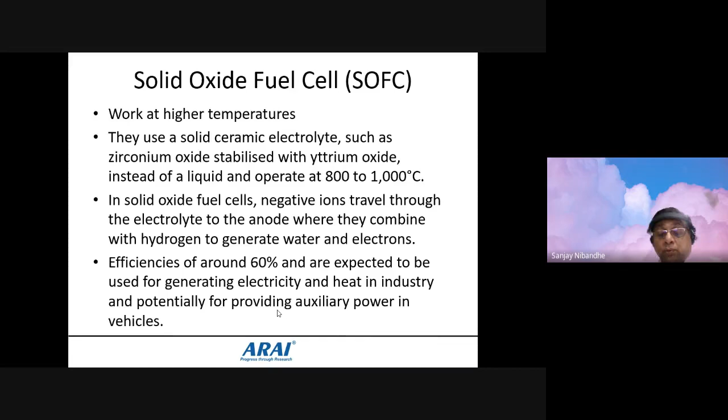Then this is how solid oxide fuel cell looks like. The cathode splits oxygen molecules from air into oxygen ions and adds 4 electrons. Oxygen ions are conducted through the electrolyte and combined with the hydrogen at the anode, releasing 4 electrons from the hydrogen, and the outcome is water droplets coming out of the exhaust systems. This is how the reaction system has been showcased here.

This work has been taken up from one of the professors from USA. So this is not readily available in the market. Probably if you're working in these areas, you can make it out and try to learn from this.

Then the highest efficiency is considered as 60%. The high operating temperature allows connections to applications, creating high pressure systems, and tolerates relatively impure fuels, which do not require a purified fuel to be used, like today we are using 83 octane or 87 octane gasoline, which is not the case. So coal and other gases also can be used from the industry side. And then high temperature operation removes the need for precious metal, therefore reducing the cost of operations.

And there are no poisonous gases or carbon monoxide, CO2 emitted from that. Sulfur resistance is also considered, which allows SOFC to use gases made from coal, and different fuels can be used for the purpose.

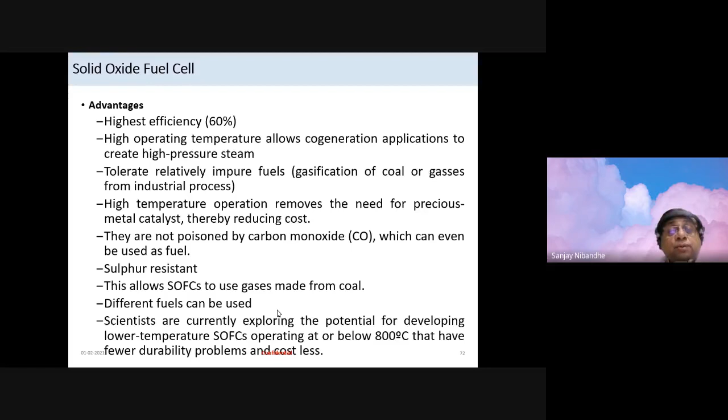Scientists are currently exploring the potential for developing lower temperature SOFC, somewhere around less than 800 degrees, and that is likely possible in due course of time. So we may get better solutions of the SOFC type of fuel cells.

The only drawback is very high weight, it requires time to reach the operating temperature, and the entire function is treated as expensive because of the materials of construction. So this is how about the solid oxide fuel cell.

We will also talk about advantages and disadvantages of fuel cells. CO2 is discharged with methanol reformation, it's a little more efficient than the alternatives, and the technology is currently at an expensive level. Many design issues are still in progress, so refinement of the entire process has not been done.

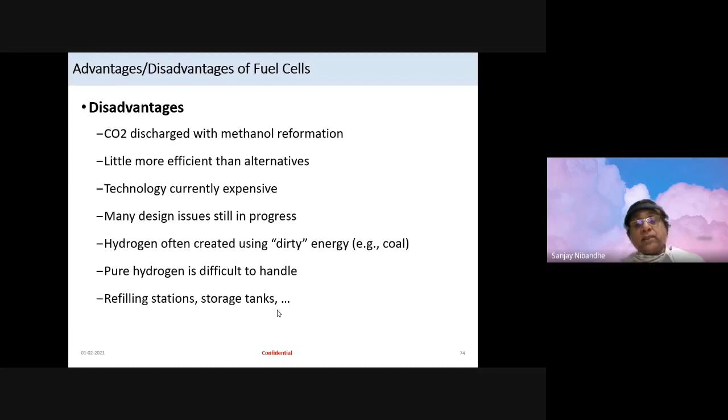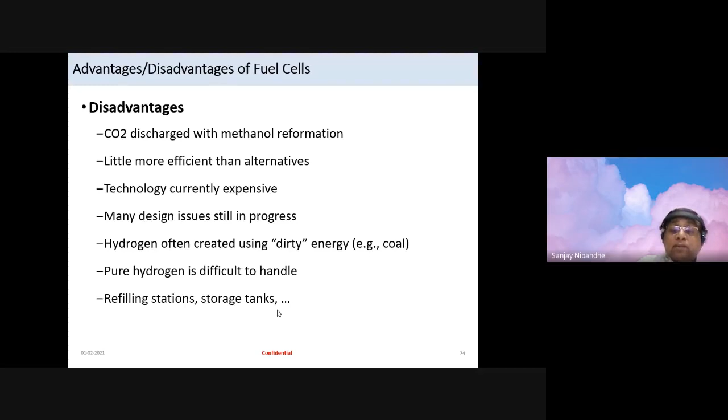The hydrogen is often created using dirty energy, meaning coal or other kinds of gases. More importantly, hydrogen storage and handling is the biggest challenge to deal with. So refilling stations, storage tanks, dispensing units - these limitations are there too. But on an experimental level, if you have visited the US, you can see all those things in place, and some universities are working on that. So at least one can be happy to see that technological developments are coming up in due course of time.

Then advantages are: no emissions, as water is the only discharge. Natural resources of fuel can be preserved. They produce zero or no emissions, and especially greenhouse effects are very low. Then having few moving parts means it requires minimal maintenance, though absolutely zero maintenance scenarios are not there.

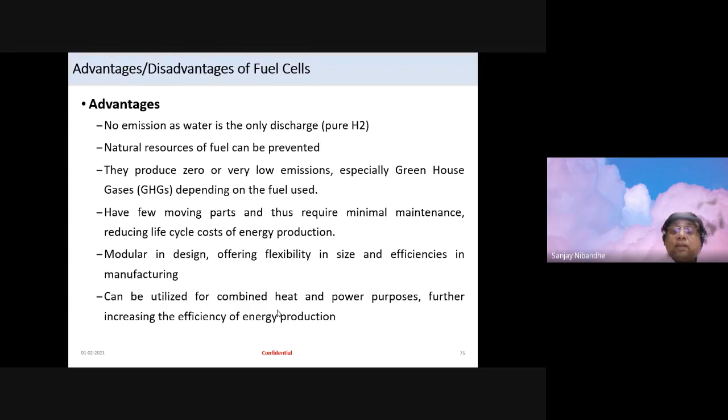The life cycles are quite high, and modular in design, offering flexibility for size and efficiency of manufacturing. This can be utilized in combination with heat and power purposes, further increasing efficiency in energy production. That is how the overall fuel cells have been considered here.

Before we go to the summary, I would like to say that these experimentations outside India are probably way ahead. We may have to wait at least another 10 years to see these developments come up in India, provided the world can show us that it is economical, viable, and makes business sense to bring in these types of technologies in future.

But as I said, fuel cells may have a longer lead time, but hybrid vehicles are a solution we can always look at. Talking about the limitations of lithium batteries, that's another area where we may have to go for alternative battery technologies which can charge quickly, so there's no delay on the operation side, and the onboard charging systems available can probably help in that scenario.

Limited sources of fossil fuel will end over time, and IC engines will stop. But the question is when? I don't have an answer. At least in the near future, it cannot happen. But maybe after 2050, we may have some insights that it may end by that time, provided other technologies are economically viable and made available in India for all such applications.

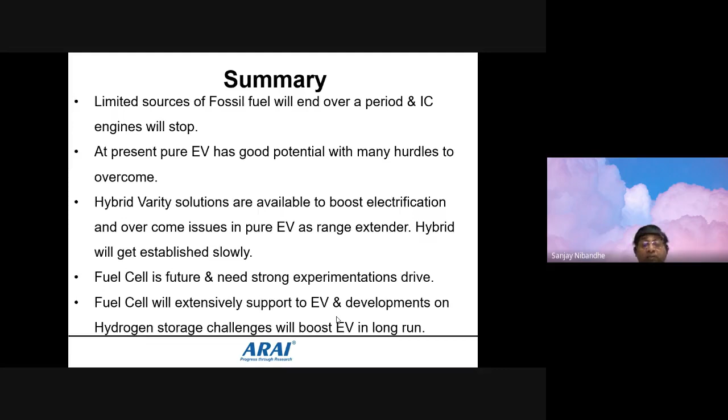The hydrogen storage, we have seen the challenges, and we need a huge boost to go for hydrogen as a longer term fuel cell solution. But I'm happy to say that key organizations like ARAI or some of the IITs are trying to work on hydrogen fuel cells, or working on those fuel cell developments. Some programs have been taken up at the university level or institutions like ARAI.

Then an optimum electric drive strategy and downsizing of the engine is one of the key features of hybrid vehicles, and this is anyway going to come up in the market. Use of advanced simulation algorithms is one of the prominent areas where lots of engineers are required to enhance their skills and software knowledge, and they have to work as today the combustion development process is being considered for emission level control for industry requirements.

Industry and university level can do the basic work, but cost which is producible and affordable for a customer and OEM is more important for the industry per se. So that is how I looked at it. Both combinations are more suitable. Professors at various colleges can work upon it, and at the same time industry can work on development at economical rates, by which industry and customer can be happy with that understanding on powertrain development.

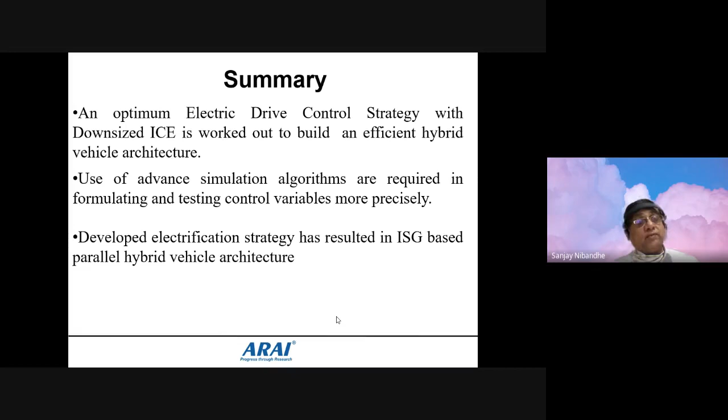Developing electrification strategy has resulted in ISG based parallel hybrid vehicle architecture, and these types of vehicles are going to come up in large numbers, and we need to be prepared for technology adaptation, as well as preparing the second generation who are aware of hybrid vehicle technology as part of architecture, their scope, and their activities, by which they can work in the industry with those programs. That is the overview from my side. I tried to touch upon three different subjects and give you an overall analogy about it.